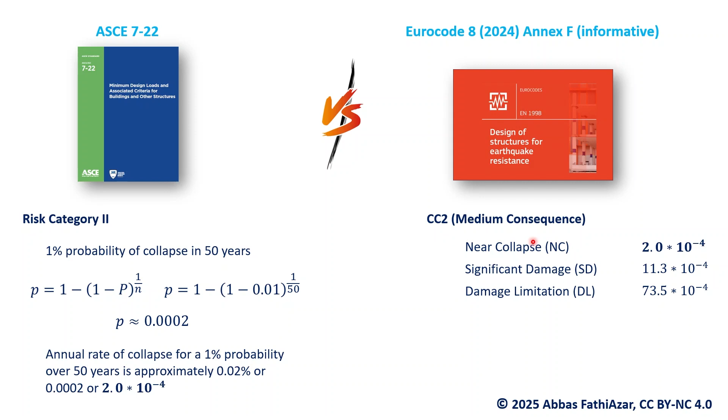ASCE 7 has long established a target reliability for seismic design, specifying a value of 2 × 10⁻⁴ for risk category 2 buildings. In the second generation of Eurocode 8, the same target value is now explicitly mentioned. Additionally, ASCE 7 defines other conditional targets that become important in risk-targeted calculations. For example, it states that the probability of collapse should not exceed 10% in the event of a maximum considered earthquake, MCE.

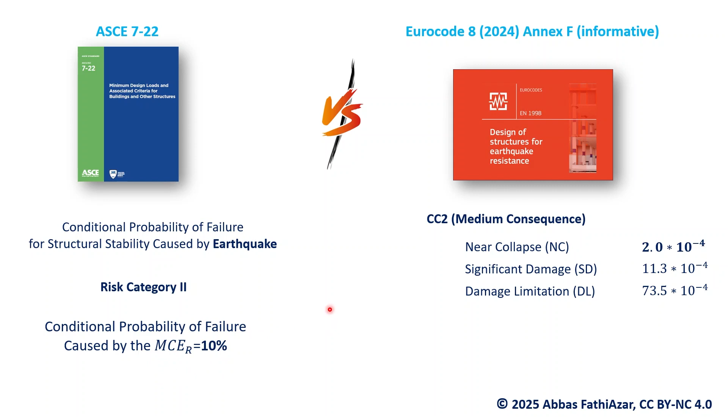Recently, the Joint Research Centre, JRC, of the European Commission published supporting documents related to target reliabilities in Eurocode 8. Let's take a look at what is included in these documents.

First, it is important to distinguish between the approach for regular loadings and seismic loads. For non-seismic loads, partial factors are calibrated to achieve the target reliability. In contrast, for seismic loads, the focus is primarily on the behavior factor, overstrength, and system detailing.

Now, in the seismic section, this document refers to the findings of the RINTC project, stating that the observed seismic reliability indices for code-compliant buildings range from 2.9 to 4.3, with an average of 3.5. This corresponds to a target reliability of 2 × 10⁻⁴.

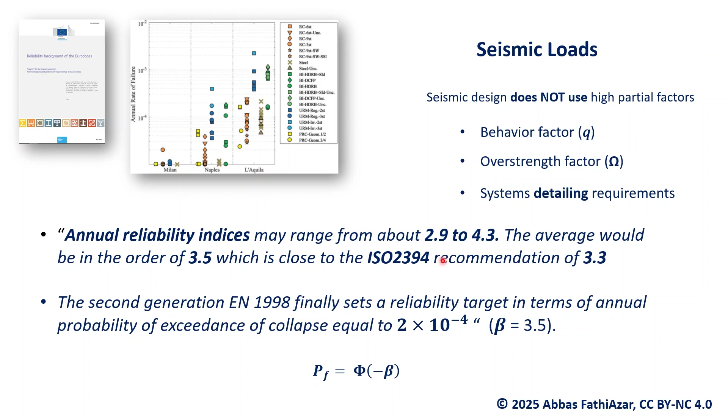Before diving into the RINTC project, let me take a step back and briefly define fragility and hazard curves in simple terms to ensure everyone is on the same page. For those who are already familiar with these concepts, you may proceed to the next section.

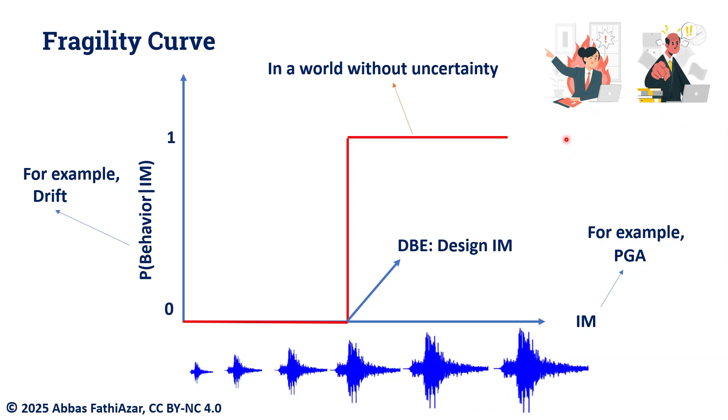I have made several simplifications in defining the fragility curve for the sake of clarity, which might not sit well with some earthquake engineers. Simply put, a fragility curve indicates the probability of a structure exhibiting a certain behavior when subjected to an earthquake of a specific magnitude or intensity.

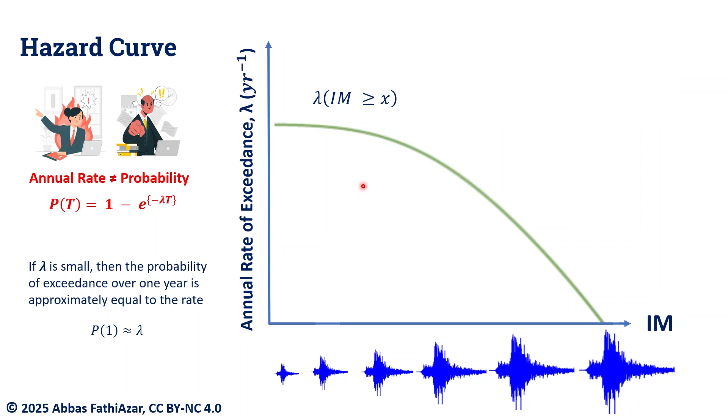On the other hand, the hazard curve tells us the probability of experiencing earthquakes of different magnitudes at a specific site. And yes, probability is not the same as the rate of occurrence.

By now, you've probably figured out how we're going to proceed. Simply put, the hazard curve tells us the probability of experiencing a certain earthquake, while the fragility curve tells us the probability of a structure exhibiting a specific behavior if that earthquake occurs. So, if we sum all these probabilities for every possible earthquake expected at our site, we get the rate of observing that specific behavior. In technical terms, this process is called the convolution of hazard and fragility.

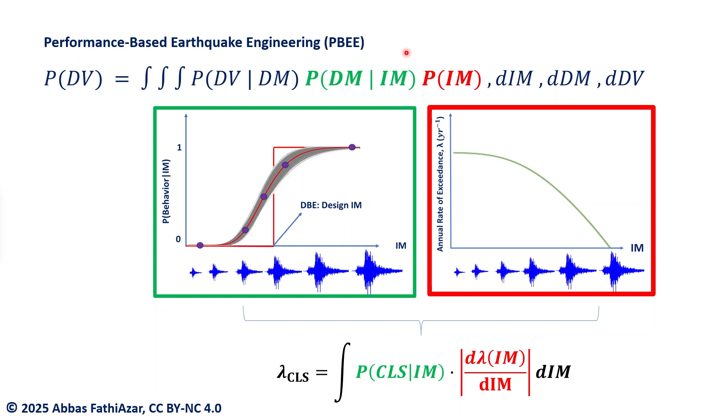Although the concept of convolution and the triple integral in performance-based earthquake engineering are not exactly the same, you can observe some similarities. These parallels can provide useful insights into their applications and interpretations. If we refer to the triple integral of performance-based earthquake engineering, PBEE, these are the first two terms. Understanding these two is sufficient for grasping the RINTC project. However, later, we will see how introducing the third term changes our perspective.

I will discuss this further in the Way Forward section. Now, let's jump into the exciting part.

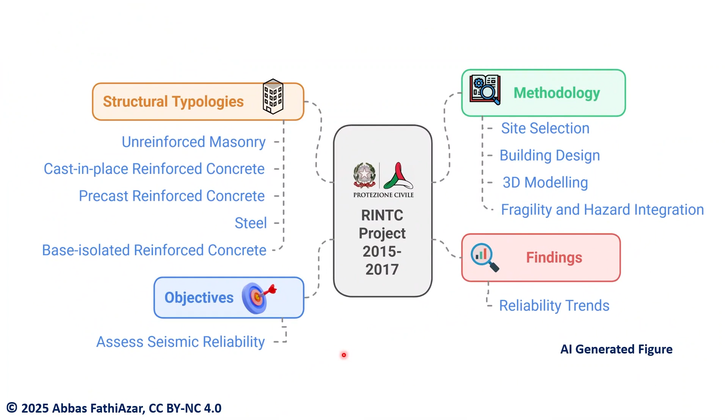In this short version, I will skip some background details about the RELUIS consortium, the structure of this project, and its sister project. Instead, after covering some key aspects of modeling, I will focus on the main findings and reliability trends. In this project,

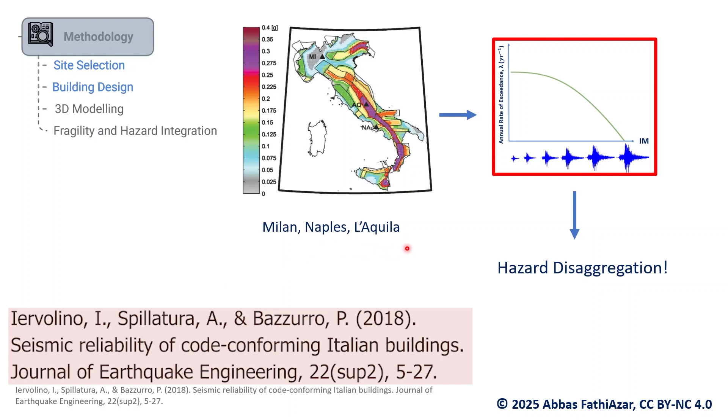3 sites were selected to represent different levels of seismicity: Milan for low, Naples for moderate, and L'Aquila for high seismicity. Hazard curves for these sites were then obtained, followed by a disaggregation of hazard analysis. We will see that this disaggregation plays a crucial role when selecting time histories.

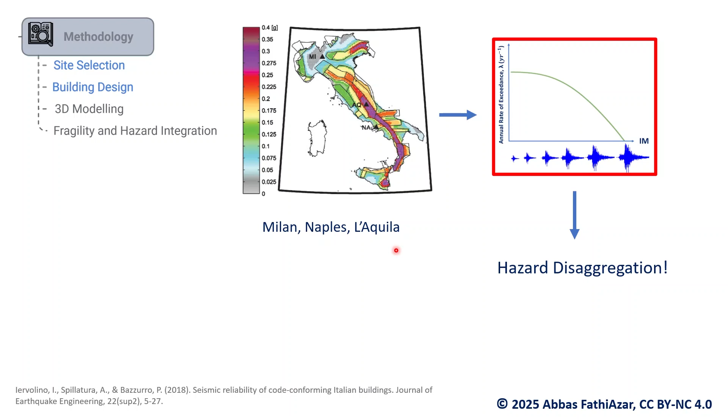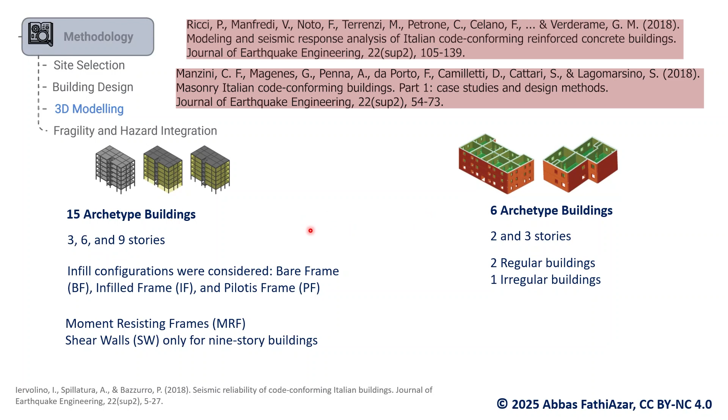The project considered 5 different building types. However, here we will focus on cast-in-place RC buildings and masonry buildings. For RC structures, 15 archetypes were evaluated, and for masonry structures, 6 archetypes were analyzed.

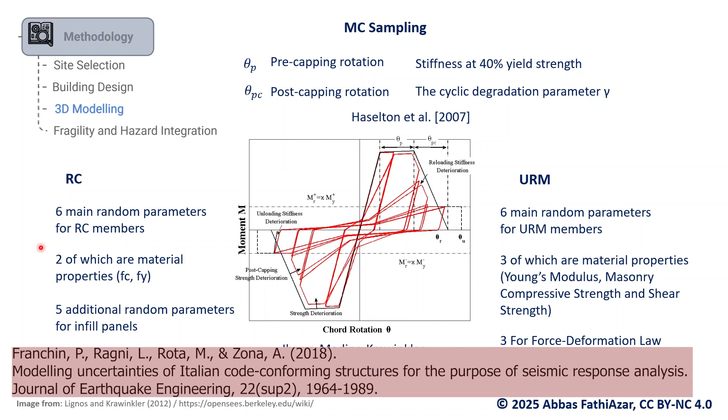To account for uncertainty, researchers selected 11 random parameters for RC buildings and 6 random parameters for masonry buildings. Among these, 4 parameters for RC and 3 parameters for masonry were specifically related to plastic hinge behavior and the force deformation law of structural elements.

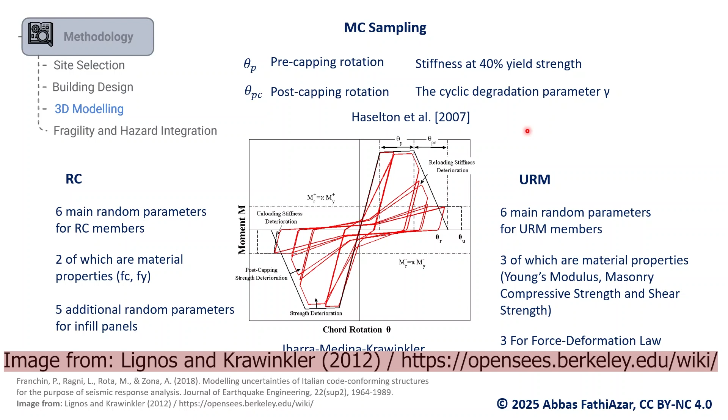They then defined a large correlation matrix to account for various dependencies between these parameters. This matrix considered 3 types of correlations.

First, inter-element correlation between floors, which defines relationships between elements on different floors. Second, inter-element correlation within the same floor, which defines relationships between elements on the same floor. Third, intra-element correlation, which defines relationships within a single structural element.

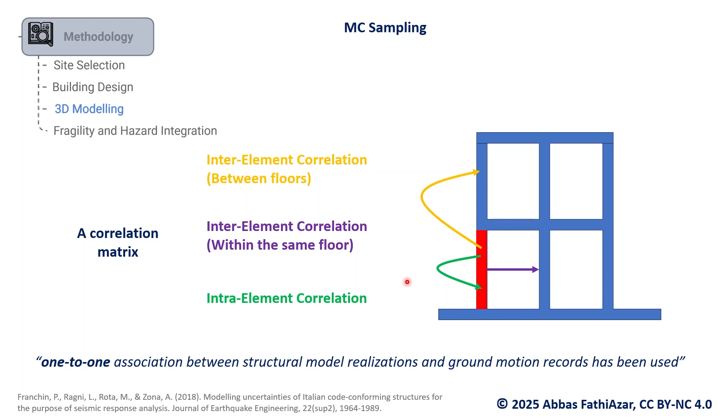Please note that in this project, a one-to-one association was used between structural model realizations and ground motion records.

In this project, 200 pairs of hazard-consistent time histories were selected through a systematic process. It began with hazard disaggregation, which helped identify the key earthquake scenarios influencing the site.

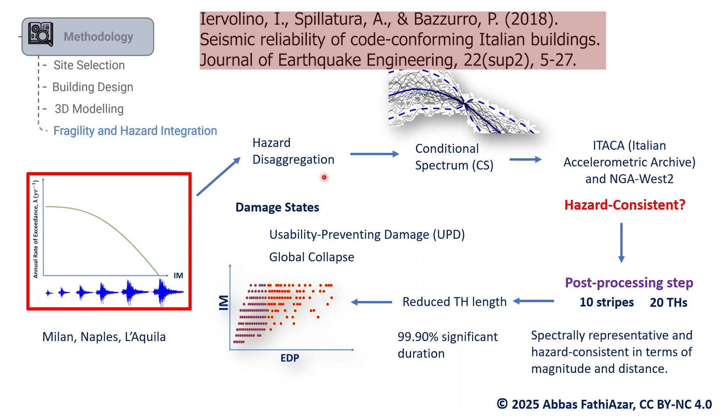From there, a conditional spectrum was derived, then using NGA-West2 and Italian accelerometric archive databases, ground motions were selected. To ensure these records remained hazard consistent in terms of magnitude and distance, a post-processing step was applied.

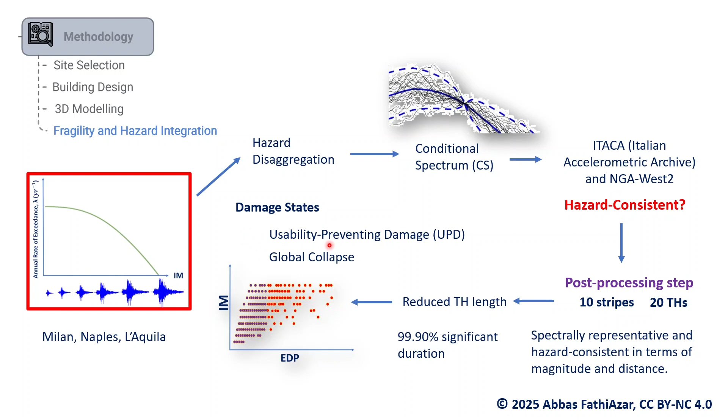Then for computational efficiency, the length of time histories were reduced to 99.9% significant duration. Finally, these refined time histories were used to derive fragility curves for different damage states, focusing on usability preventing damage, UPD, and global collapse. Now, let's examine the findings.

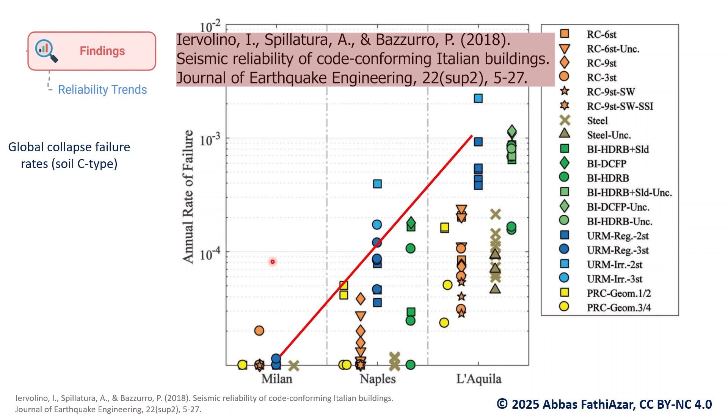As you can see, seismic reliability decreases by 2 orders of magnitude as seismicity increases. It's important to remember that these results apply to code-compliant buildings, meaning that structures in higher seismicity regions are already designed to withstand stronger earthquakes.

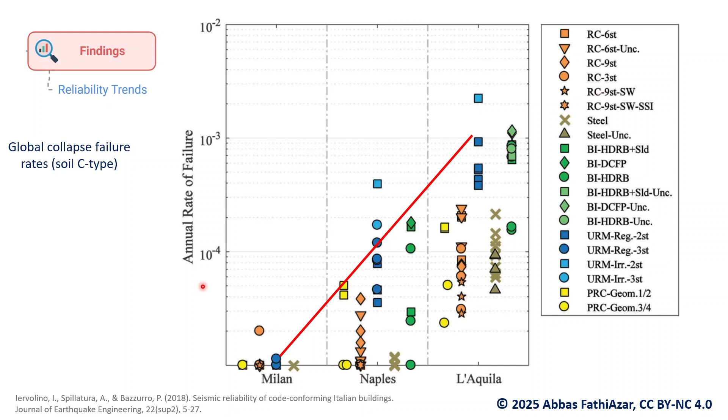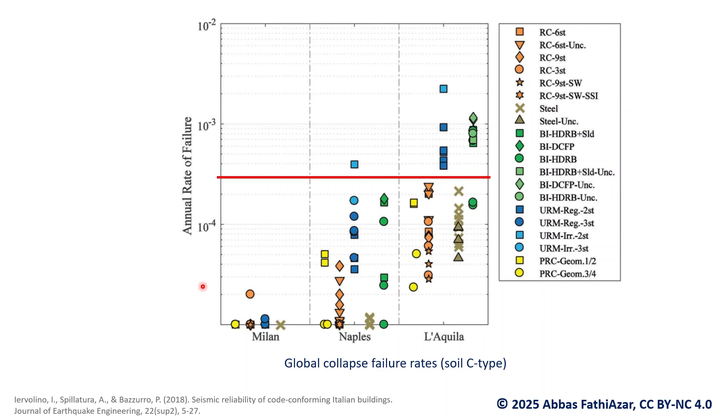However, when we compare these findings with the target reliability specified in the code, the results are not as drastic. Only for certain types of buildings in high seismicity areas do we observe unacceptable collapse rates.

When we compare the exceedance rate trends between collapse rates and usability preventing damage states, these findings open up a new perspective. Let me ask you, what do you think is most important when considering post-disaster recovery? Can we infer UPD rates from collapse rates? And what implications does this have for seismic design for resilience?

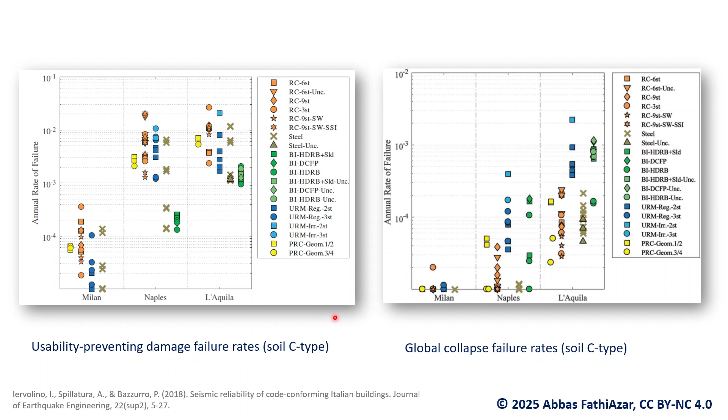Now, let's move to the way forward section, where we introduce the 3rd term of the PBEE triple integral. This term connects the probability of a structure exhibiting a certain behavior to decision variables. The exciting insight begins when we explore which decision variables to consider, as they will shape how we assess and manage seismic risk moving forward.

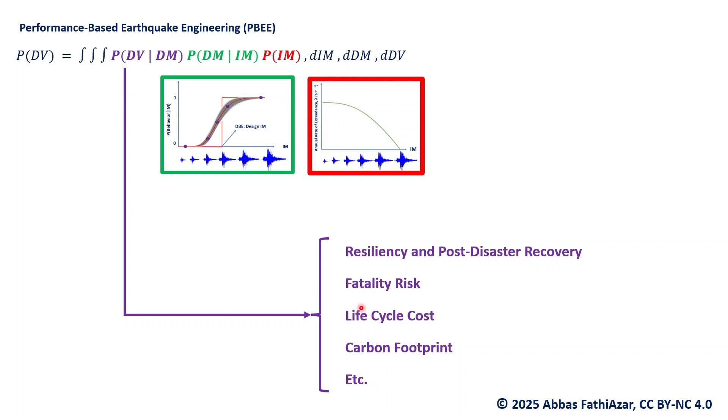There is one interesting study on the fatality risk of code-compliant buildings built upon the findings of this project. It highlights that while fatality risk varies with seismicity, it remains lower than other common causes of death in Italy, such as diseases and accidents, which is reassuring news.

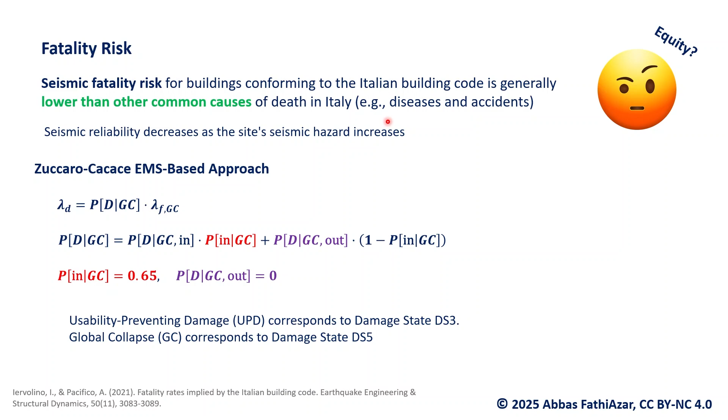However, what do you think will happen when we introduce equity considerations? And finally, would it be economically viable to increase target reliabilities if we consider the entire life cycle cost and...

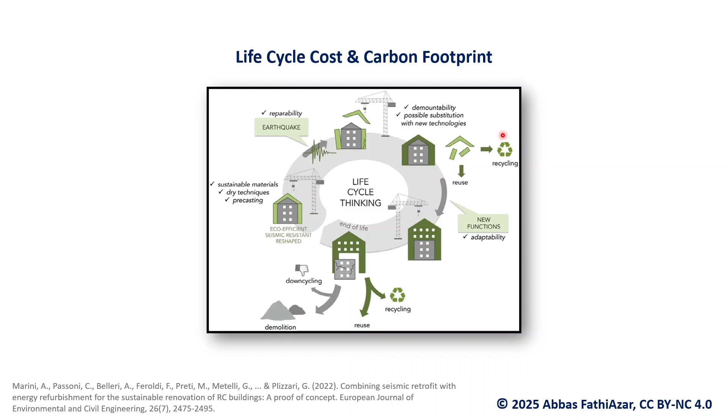...carbon footprint of buildings? Although ongoing studies in Italy are already addressing these questions, why not integrate these factors into our risk targeting calculations? Would this lead to a more sustainable and cost-effective approach to seismic design?